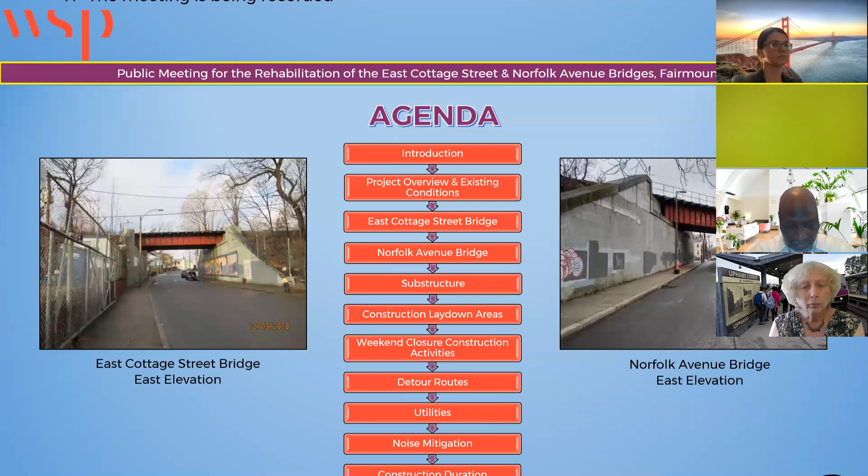All right, so let's get started. As part of our bridge program, the MBTA carries out regular inspection of our bridge structures. The MBTA railroad bridges over East Cottage Street and Norfolk Avenue are about 100 years old and have been found to be structurally deficient. That means elements of those bridges must be monitored and repaired. If this action is not taken, they will eventually become unsafe to carry train load.

For these two bridges, a detailed engineering study completed in 2019 recommended that they be replaced. This will involve installing a new superstructure and repairing the foundations. We're currently at the 75% stage of design. The design is therefore still developing, and we look forward to your comments and feedback.

The MBTA project consultant for this project is WSP. The WSP team is led by Ms. Philomena Maybury, and they're here tonight to provide an overview of the project.

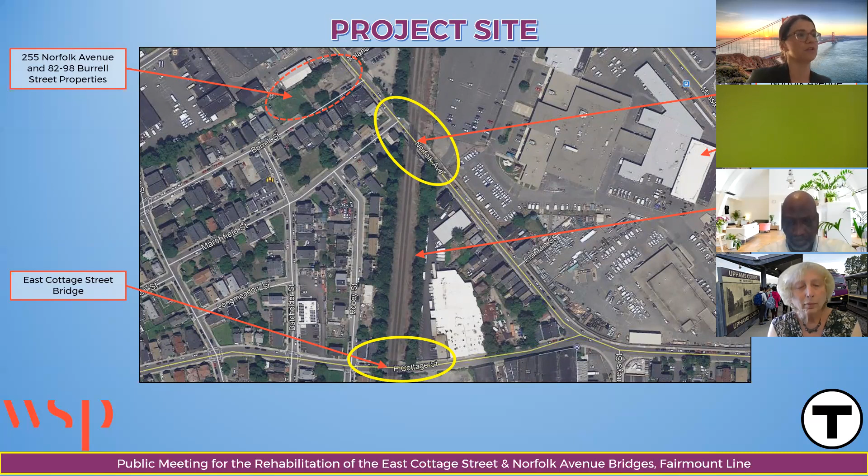As Bashir mentioned, the project is to replace two existing bridges along the Fairmount line that cross over East Cottage Street and Norfolk Avenue. These bridges are old structures, both constructed in 1906, making them over 100 years old. Although they've performed well, they are reaching the end of their life, and have risen to the top of the priority list in the MBTA's bridge replacement program. The main reason is that they do not meet current statutory loading requirements, though there are other reasons.

As you can see from these two photographs, these are the bridge decks at the right of way, called open deck bridges—they are not ballasted over the bridges. The MBTA, for maintenance and vertical alignment purposes, prefers ballasted deck bridges, so that modification will be made when we replace these bridges. They're fairly small: East Cottage Street is a 43-foot span, and the Norfolk Avenue Bridge is slightly longer at 63 feet 8 inches. Both are about 30 feet wide, accommodating the inbound and outbound tracks along the Fairmount line.

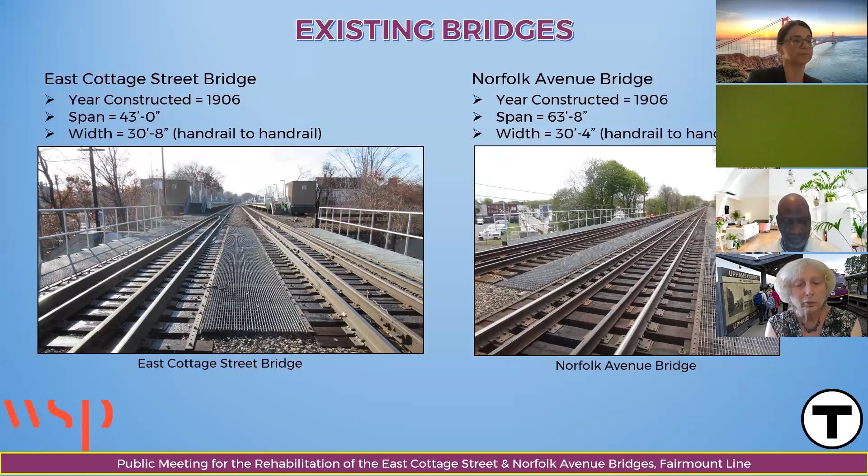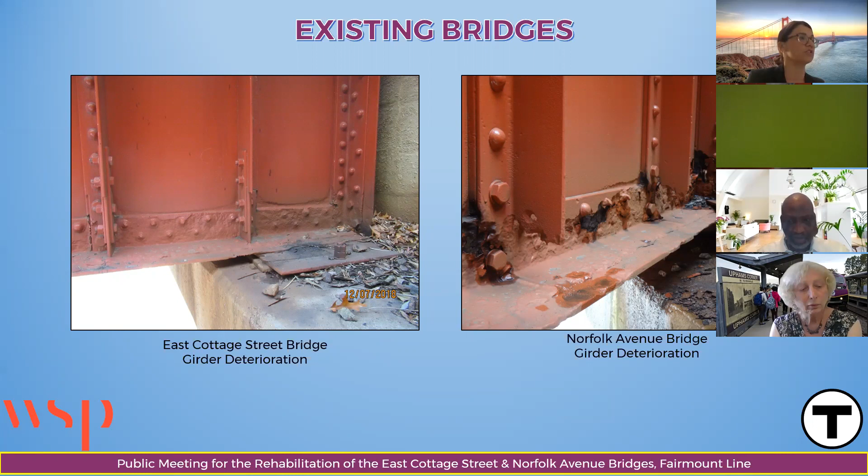If you drive by and look up at these bridges, you'll likely think they don't look in that bad a shape. They're freshly painted and don't appear to the naked eye to be deteriorating. However, as inspections over the normal frequency have revealed, as well as WSP's condition assessment performed last year, these bridges do show significant deterioration at various locations of the steel elements, as seen in these photographs—section losses to the steel structure resulting in substatutory loading ratings. So they do require replacement in order to meet current loading requirements.

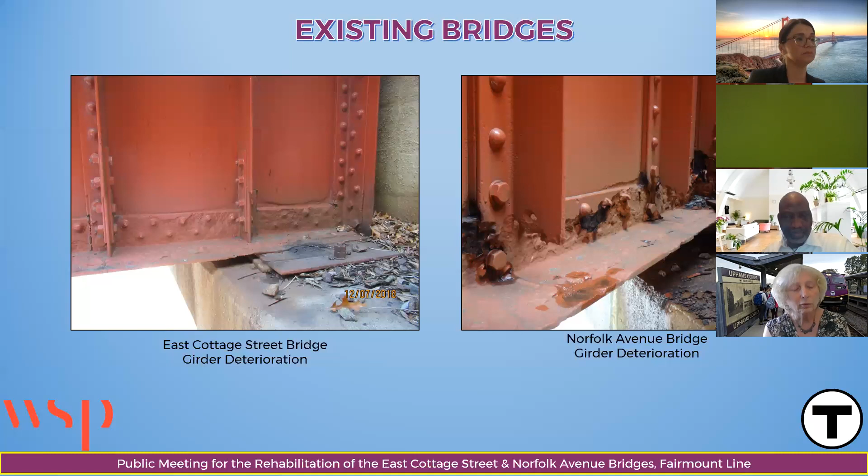These structural schemes, very prevalent back in the early 1900s, are what we call fracture critical bridges. This means that if either girder were ever severely damaged to the point where it could no longer support its intended load, there is no redundancy built into the structural design, and it would result in having to close the bridge and therefore close the Fairmount line. Having these types of structural designs leaves the MBTA vulnerable to that situation, and that is another reason these bridges rise to the top priority for replacement.

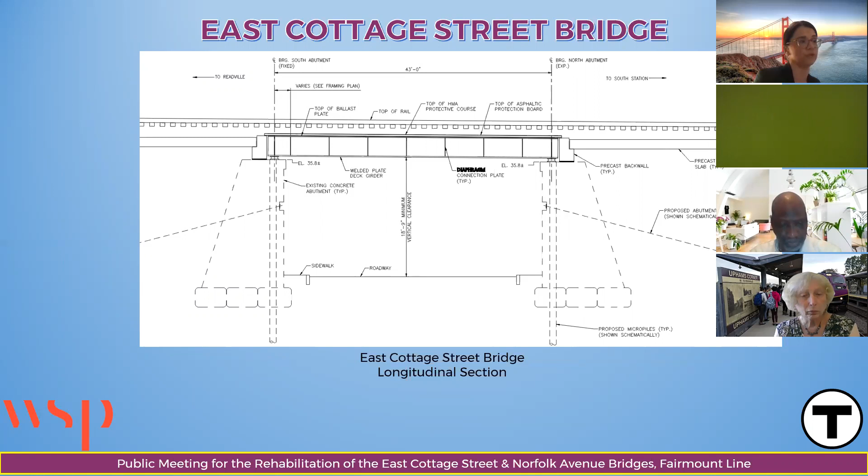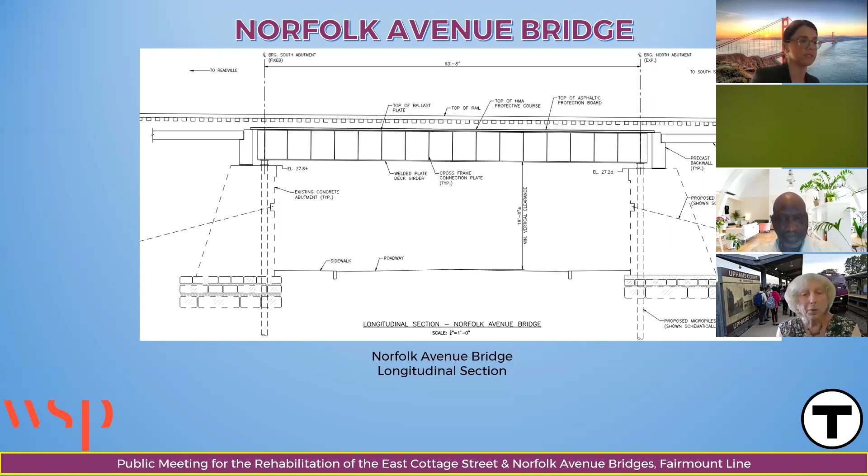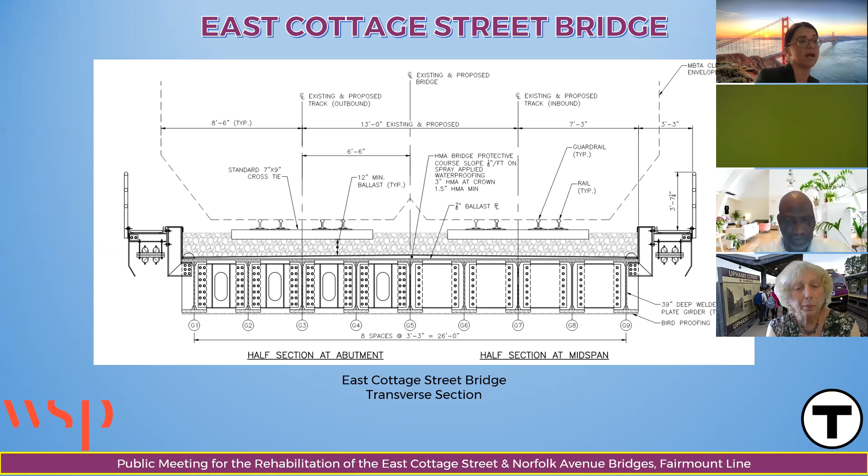As mentioned, the existing bridges are comprised of 2 girders, fracture critical girders as I called them, that each support both the inbound and outbound tracks. This is a cross section of what we propose to replace the superstructure with, a multi-girder arrangement of 9 girders, providing the redundancy I mentioned earlier. This makes the design redundant, so if one of these bridges were ever damaged and needed repair, it could be done without closing the bridge or implementing an outage of the Fairmount line.

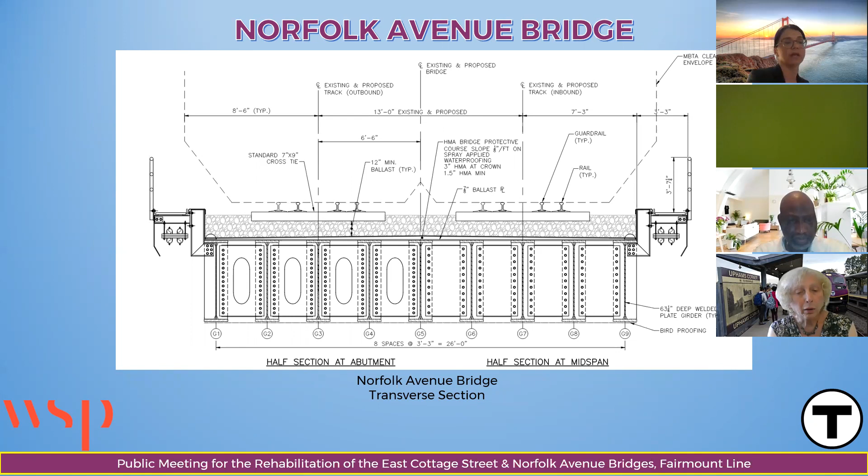Similarly, the cross section at Norfolk Avenue has a slightly deeper girder because of the longer span and heavier load, but again, 9 girders with a redundant structural system.

As I mentioned, we will not be demolishing or removing the existing concrete abutment structures. They're in good condition, and that is a huge benefit to the project, not having to do that. That would be a significant undertaking and a much bigger project. But we do have to strengthen these structures because of their age; they were not designed for current statutory requirements.

We intend to do that by installing micropiles, which will be installed from the right-of-way level, or track level, through the abutment wall. Some of this work will have to occur at night, and some will occur during single track operation on the weekends.

The tiebacks will be installed at street level; these are horizontally drilled elements that provide additional lateral resistance to the abutment structures. This will be done during the day but will require a lane closure. The intent is to leave a lane open, have a police detail directing traffic, and maintain pedestrian access. Rachel will talk about that in more detail later in the presentation.

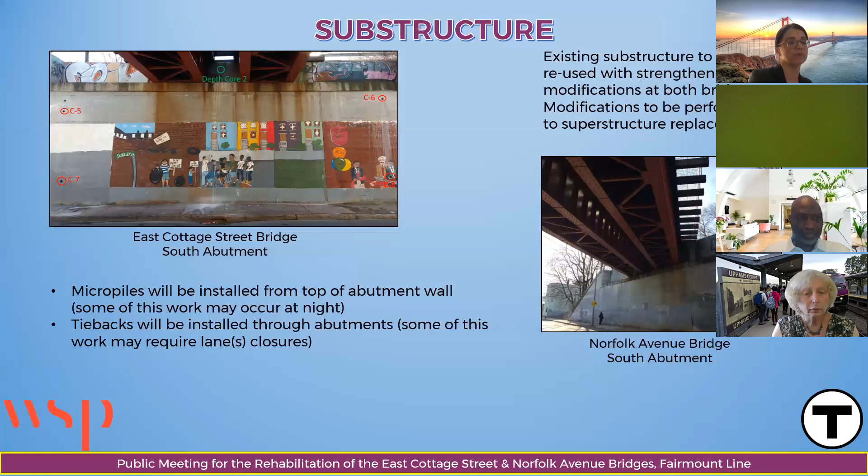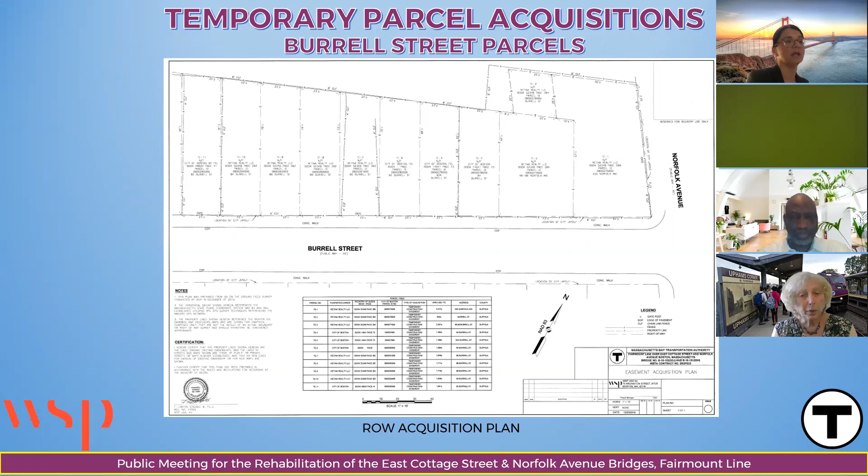For the MBTA to provide the contractor with some space nearby, the MBTA is undertaking an agreement with the owners of some vacant parcels on Burrell Street, adjacent to Norfolk Avenue. These parcels are owned by both the City of Boston and a private entity, and the MBTA is currently finalizing those agreements.

Again, these are privately owned, so the MBTA will be seeking a private agreement to temporarily acquire these parcels. They are in close proximity to the Norfolk Avenue Bridge and will be very useful for the contractor. We envision that the contractor will place his field trailer there, as well as store materials that he will need to use nearby for some of the concrete abutment work and repairs, as well as other storage for equipment and materials of that sort.

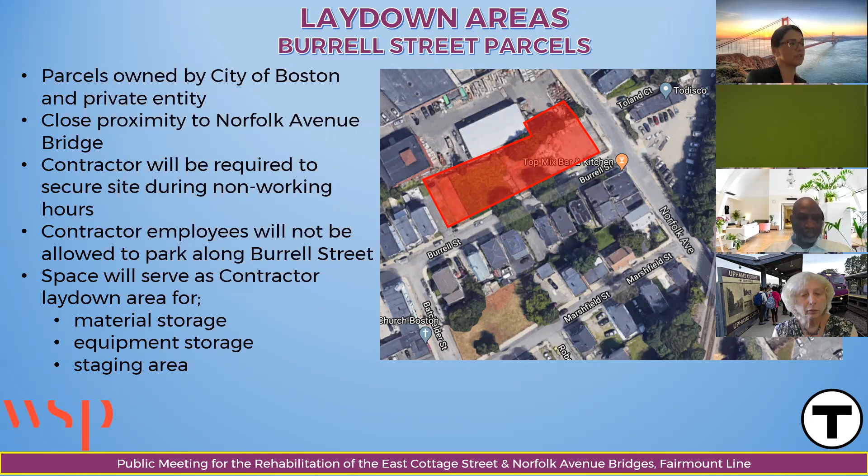The contractor will be required to secure this site during non-working hours. And we understand that Burrell Street is already a tight throughway, both with residents using it for parking as well as being a two-way street. So we will have written in the contract documents that contractor employees will not be allowed to park along Burrell Street. And as I mentioned, the space will serve for the contractor's lay-down area for material storage and equipment storage and some staging.

Other lay-down areas that the MBTA has identified for the contractor's use for this project exist along Alexander Street. This is an existing MBTA property along Alexander Street and between Alexander Street and the Fairmount Line, just south of Uphams Corner. This will also be offered to the contractor as a potential lay-down area for equipment and material. And because of its proximity to the right-of-way adjacent to it, it may very well be used as one of the contractor's access points to the right-of-way on the rail line.

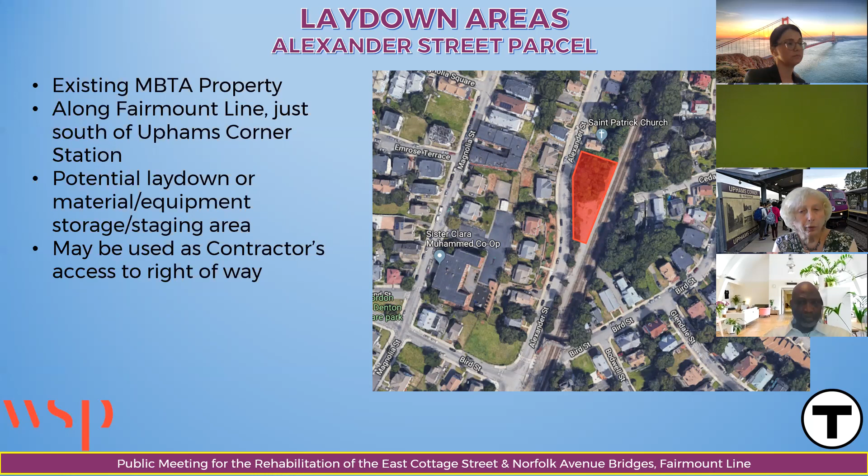One of the important assets that we have been able to add to the project is securing the Readville Yard, which is an MBTA property, for the contractor's use during this project. What securing this space allows the contractor to do is to have all of the beam replacement elements brought and transported to Readville Yard, stored at Readville Yard, and there is sufficient space at Readville for the assembly of the bridges. This is in close proximity to the Fairmount Line and will allow for transport of those steel elements that are being replaced by rail versus truck.

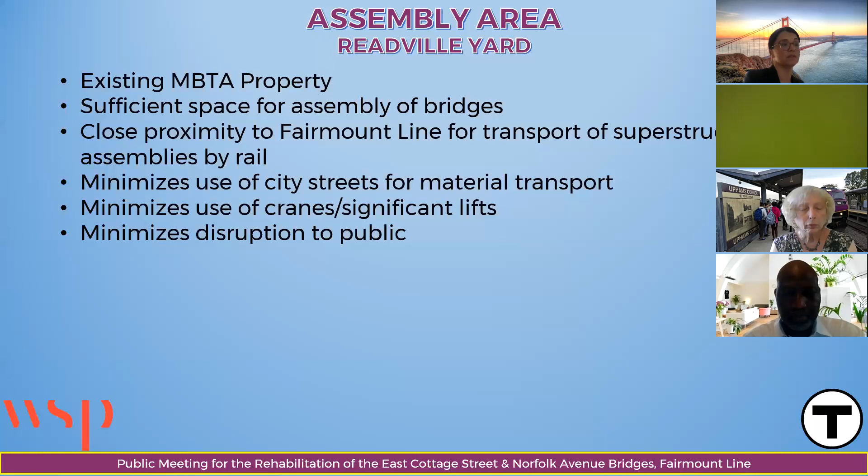The MBTA did a lot of work to secure this space and all the coordination required to secure the space at Readville Yard, but this was really important to the MBTA in minimizing the impact to the public. This will minimize the use of city streets for the material transport. As I mentioned, those heavy long beams typically have to be transported by very large trucks, and those are not easily navigable through city streets. It avoids the need to worry about that. It also avoids the need for additional cranes and significant lifts of these bridge assemblies during and near the community. And all of this results in significantly minimizing the disruption caused by this project to the public.

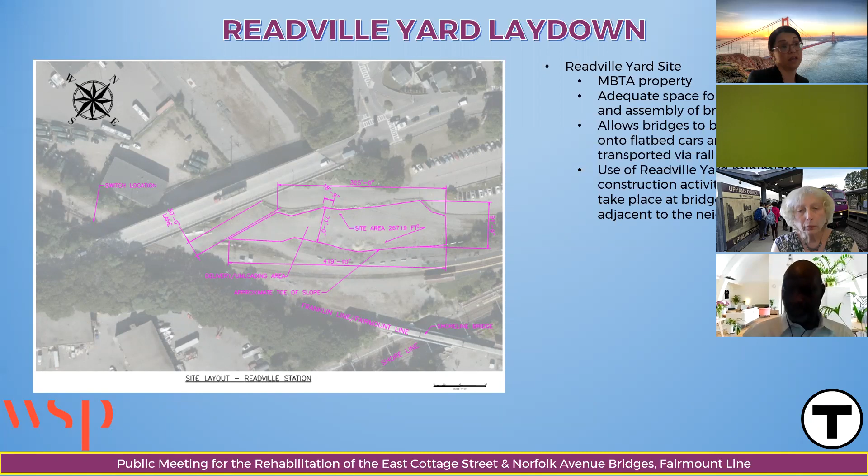This is just another plan view of the Readville yard, again, owned by the MBTA. This shows in plan the area that the contractor will have at their disposal to not only store the bridge girders, but also to perform the assembly. Each of the 4 bridge halves that will be installed at each of the bridge sites will be assembled in this area. They will be loaded onto flatbed cars and transported via rail over the course of 4 weekend outages to the bridge sites for installation. Again, having this area for our use and for the contractor's use is a huge benefit to the project, and really does quite a bit in terms of minimizing the heavy duty construction that actually has to occur near the bridge sites, and as a result, minimizing the disruption to the neighborhood and the abutters.

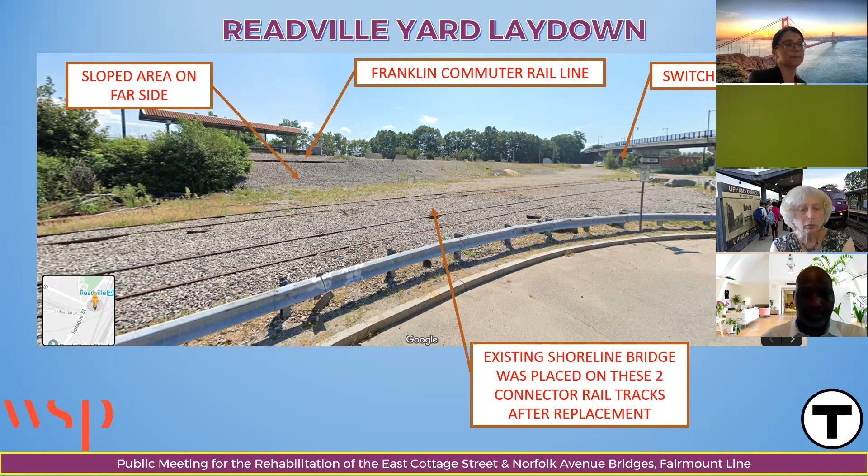The weekend closure will start sometime about 10 p.m. on a Friday night and continue for the entire weekend until about 4 or 5 a.m. on a Monday morning, and be ready for the Fairmount line to pick up normal service at that time. During these weekends, the MBTA will be providing busing as an alternative for the Fairmount line passengers.

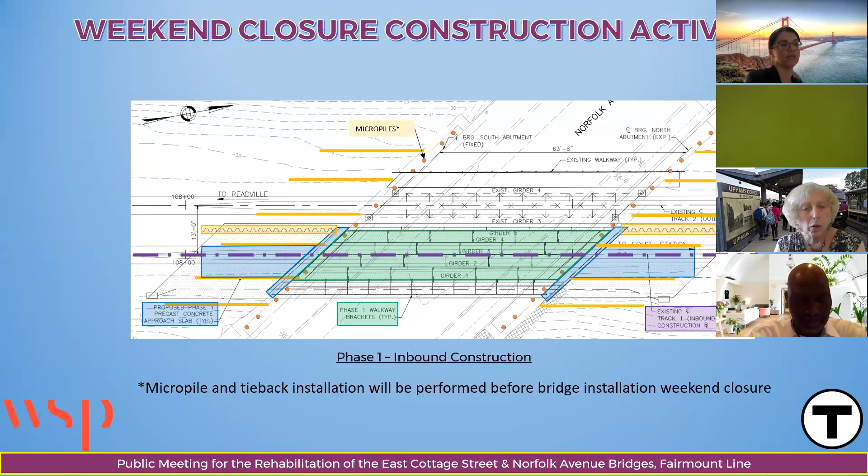During the weekend work, the bridge will be demolished. As I mentioned, a flatbed car will come down from Readville. The demolished section of the bridge will be loaded onto the flatbed car and taken away, again via rail, back to Readville. The approach slabs will be installed. These will be precast concrete elements that will be ready to be picked and installed. The new bridge will again come in via rail. The new bridge will be put into place. The track and rail, ties, everything reinstated, ready again for Monday morning. So this represents the work that will occur during 1 weekend outage on the inbound side. 2 consecutive weekends, and both inbound sides of the bridges will be installed.

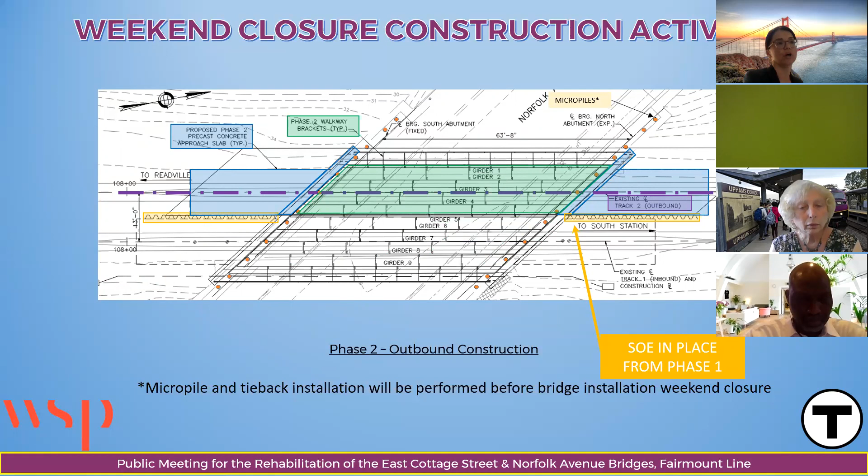Similarly, I'm not going to take as long on this side. Same activities will occur on the outbound side. Demolition, bring in the precast approaches, bring in the new bridge, put it in place, reinstate the track work, ready for revenue service on Monday morning. And we'll have 2 weekend closures to accomplish this work, 1 weekend at Norfolk Avenue and 1 weekend in East Cottage Street.

With that, I'm going to invite Rachel to please discuss the impacts of traffic. Well, good evening. My name is Rachel Burkhart. I'm a civil engineer at WSP and work with Phil and Bashir on this project here.

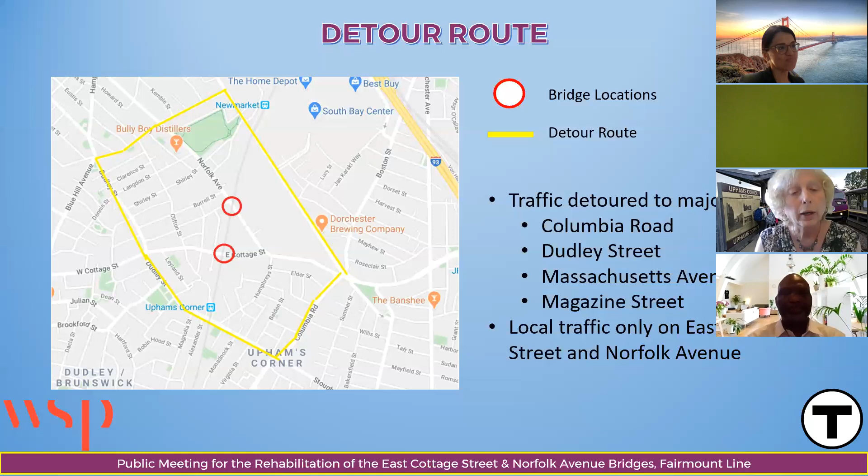So for example, if they're doing the first weekend at Norfolk Avenue, to get there from Columbia Road, you would take the right at East Cottage Street. So right at that location, we'd have a big sign that would say construction happening at Norfolk Avenue, local traffic only, and then the through traffic should detour. That would guide people down south on Columbia Road to Upham's Corner, take the right turn onto Dudley Street under the tracks, and then over to East Cottage if you're headed in that direction, or if you need to get to Norfolk Avenue, you continue down, take the right turn by St. Patrick's onto Magazine Street, and then you get to Norfolk Avenue.

So the idea of this is whatever work is going on here, we'll have the signs up, detour the through traffic so people aren't trying to get down the narrow residential streets in the neighborhood, and instead stay on the bigger streets and avoid coming through when construction is going on.

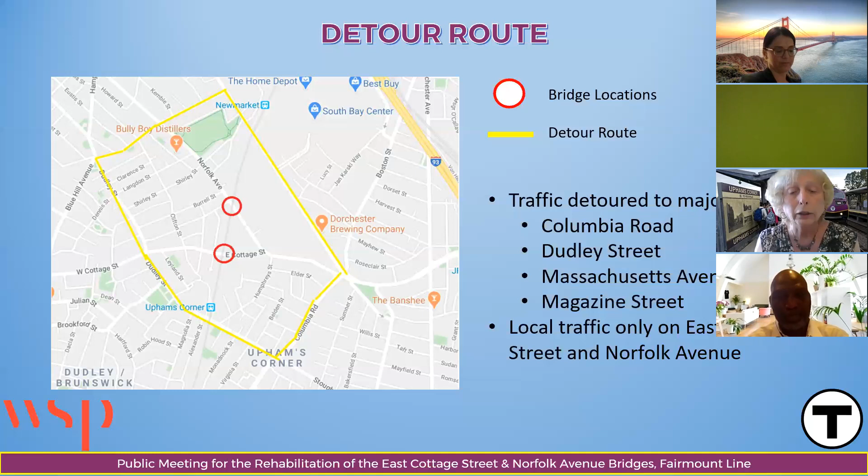So if they're working on the abutments and drilling in the tiebacks or doing some other masonry work to touch up the abutments, they can do that on one side of the road while we maintain traffic alternating in one lane, and then we also have one sidewalk open so people can walk past. So we would do that on one side of the road and then flip it over to the other side of the road.

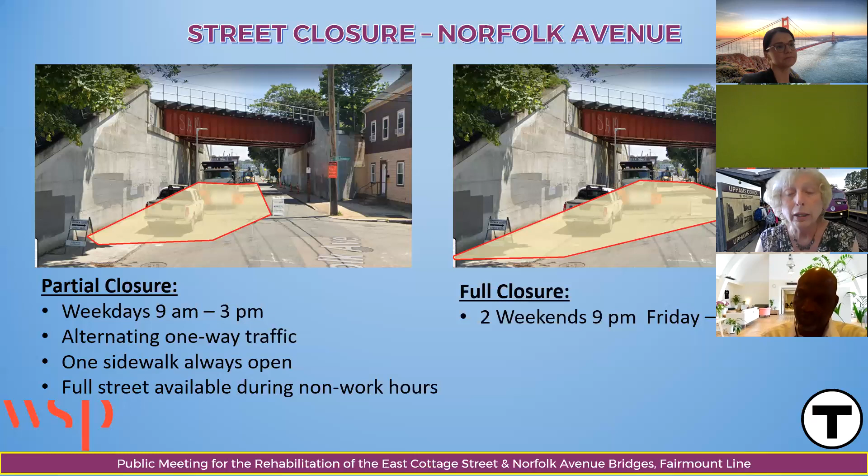So because that's really heavy construction work, the only safe way to do that is to close the street down. But we would maintain access to everybody's houses here during that time, so everyone could get to their residence or their business. So if we go to the next slide here, this is looking the other way. So this is if you're coming from Columbia Road.

So in these two pictures, immediately if you were to turn to your right, you would see the Eversource site there. And so again, the idea here in the picture at the left is we would take all but one lane to do work on the concrete abutment during the weekday work periods. And then for the weekend full closures, which is only 2 weekends for the bridge, just to emphasize that.

And on the road closures, Phil had said the operations might end at 10 o'clock, but we need to close the road a little earlier at 9. And then the road probably won't be open until about 6 on Monday. So the rail operations will start a little later and get going a little earlier on that day, but then the contractor has to demobilize all their equipment and their crane and all of that stuff, so they need a little more time to do that. So that's kind of the overall idea.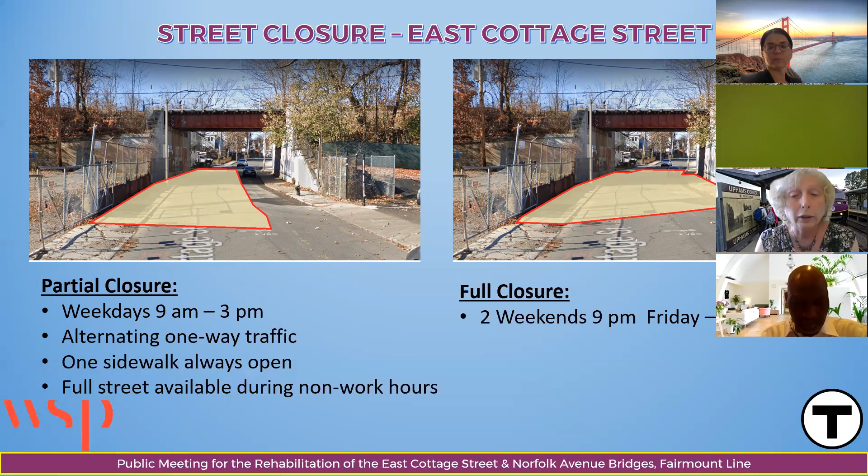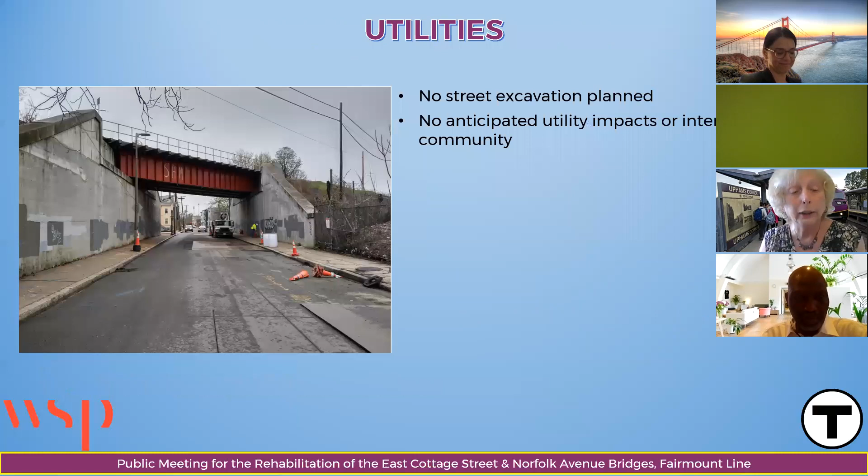And then moving along here, one other thing Phil asked me to talk about is the utilities. So whereas on some bridge projects you have to dig up the street for various reasons, because those big concrete abutments, as Phil said, are in pretty good shape, we don't have to actually dig up the street for anything here. And we're not going to do that. We're not going to have any impacts on the utilities.

So there's no situation where there'd be a loss of water service or anything like that during this, because we don't need to do that. The only thing we would do to protect the utilities is when they bring out the big crane, they usually put down those timber mats to spread the load out so it doesn't damage the utilities below the road. So with that, let me turn it back over to you, Phil.

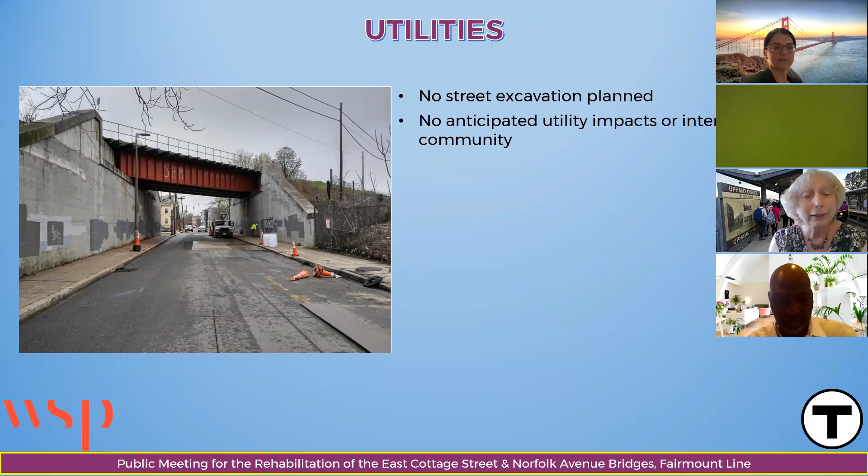Thank you, Rachel. So everybody understands that construction projects can be noisy. As I mentioned, the MBTA has gone through great lengths to really try to move as much of the heavy construction out of the neighborhood, and that's being accomplished by the assembly and transport of the bridge sections that is going to occur at Readville Yard. So that is a huge way to mitigate any noise that would have occurred right in the neighborhood.

There will still be activity at the bridge sites. There will still be the tieback operation, as well as the micropile installation and some other minor repairs to the bridge abutments themselves. The contractor will be required to submit a noise monitoring and control plan to the MBTA for review and approval. And that plan will be required to demonstrate the contractor's noise mitigation measures.

Some of those that are required include installing noise barriers where possible, and having truck backup alarms that are ambient sensitive. We will not allow any truck idling beyond a maximum of 5 minutes, and there will be attention paid to equipment used during nighttime hours, with limitations on that. So there is a sensitivity to noise and mitigating that to the community, and that will be communicated in the contract documents for the bidding contractors.

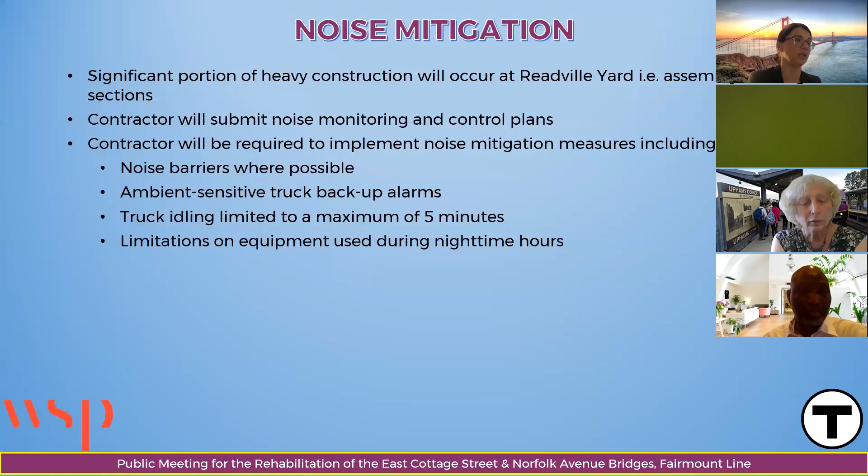And as we've mentioned, for the installation of the 4 bridge halves, we will have to impose 4 weekend outages of the Fairmount Line, where busing service will be provided as an alternate means of getting passengers to and from. So that is just a synopsis of the construction duration and some of the work windows. And with that, I'll turn it to Bashir, who's going to talk a little bit about the costs.

Thank you, Philomena, and thank you, Rachel. Let me just speak very briefly about the cost, and I will expand a little bit on the schedule. Starting with the schedule, we anticipate to have the final design submitted by mid-June or thereabout. Once we have those plans, we will take steps to advertise the project, and we anticipate that to be sometime towards the end of July.